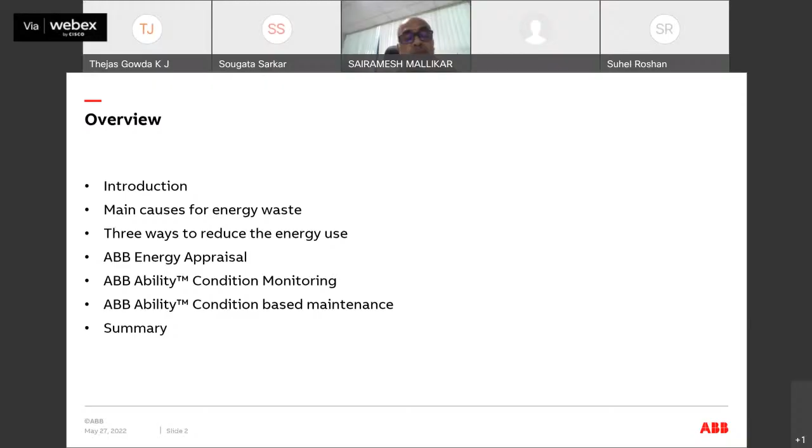First, we'll talk about the introduction, why energy consumption is predominant in the current scenario, and what are the main causes because of which energy is getting wasted in the electrical system. Then the ways in which we can reduce it, and what ABB is offering to the customer: ABB energy appraisal, ABB Ability condition monitoring, and ABB Ability condition based maintenance. These solutions improve the energy efficiency and reliability of your system. We'll talk about these topics in detail, and then summarize everything we have covered in this session.

So first, talking about the energy. As you all are aware, the global population is expected to rise to 9.7 billion by 2050, and the economy will be doubled by 2050. Urbanization and the rise of living standards will also increase. So this will increase the demand for energy in the near future.

And also the demand for drive systems powered by electric motors will also grow. So thinking about all these aspects, one thing that we need to keep in mind is that in the future, energy consumption and utilization will be higher, which will create a demand for energy. But we cannot stop the process. We have critical processes. We cannot stop the plant in order to save energy.

But the way in which we can do it is by using an energy efficient system and reducing CO2 emissions. So how do we achieve it? By using a high efficiency motor and a variable speed drive, which I'll talk about in the upcoming slides.

And talking about industries specifically, more than 70% of the electricity is used by industries. Out of this 70%, 2/3 of the energy is consumed by the motor alone. That is the reason the motor plays an important role when we talk about energy saving in industries.

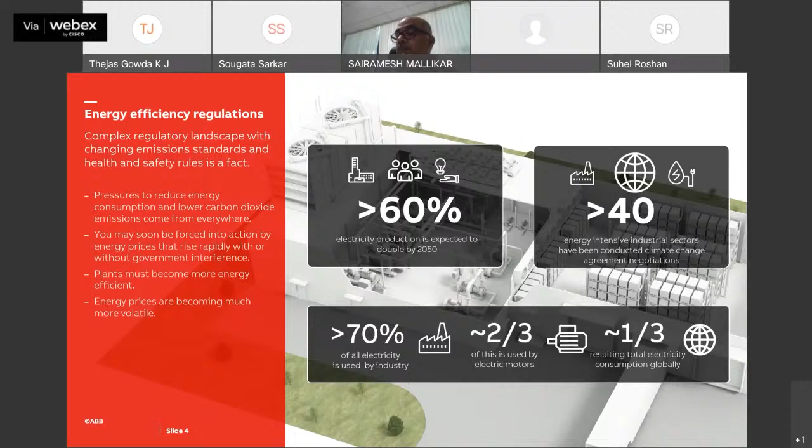The pressure to reduce energy consumption and lower carbon dioxide emissions comes from everywhere. We will soon be forced to use high efficiency systems in order to reduce energy consumption. And the prices are also volatile. Energy prices, if you see, can be volatile. That's why we need to take all this into consideration.

So now looking at the main causes of energy waste in a manufacturing process, there are four main causes. One is the over-dimensioned motor. The second one is the low efficiency motor. Third is a variable load process running at full speed, and then poorly maintained assets. These are the four major causes resulting in energy wastage. We'll talk about these in detail in the coming slides.

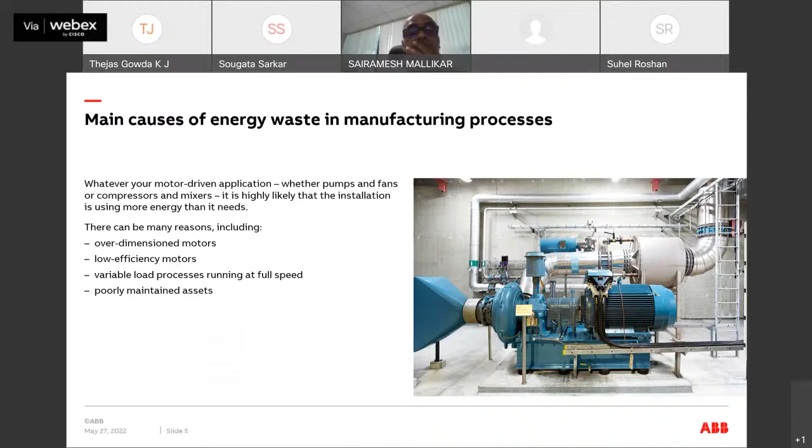The first is over-dimensioning. I would like to explain over-dimensioning by taking an example. Let us take a pump, where the requirement is to deliver a flow of 500 cubic meters per hour. For this application, we need a 50 kilowatt motor. But keeping future needs into consideration, we go for a higher flow, which is 600 cubic meters per hour. So what would our system integrators do?

They will give an additional margin, maybe a design margin or a safety margin of 10%, which will increase your motor kilowatt by 10%, resulting in using a 75 kilowatt motor. And then what will your pump selector do? He'll give an additional 10% margin, which will further increase your motor power rating to 82.5 kilowatt. So then we'll select a motor in that range, a 90 kilowatt.

So now if you compare these two, earlier we required a 50 kilowatt motor. Now we are almost double what is required. We can say it is almost 100% over-dimensioning of the motor. This is one of the major concerns, where from installation itself it is consuming higher energy.

And if as a customer you are still following the traditional way, where you are controlling the motor by the valve, then it will result in much more losses. That is why if you are using a variable speed drive or variable frequency drive, you will be able to save almost 50% of energy.

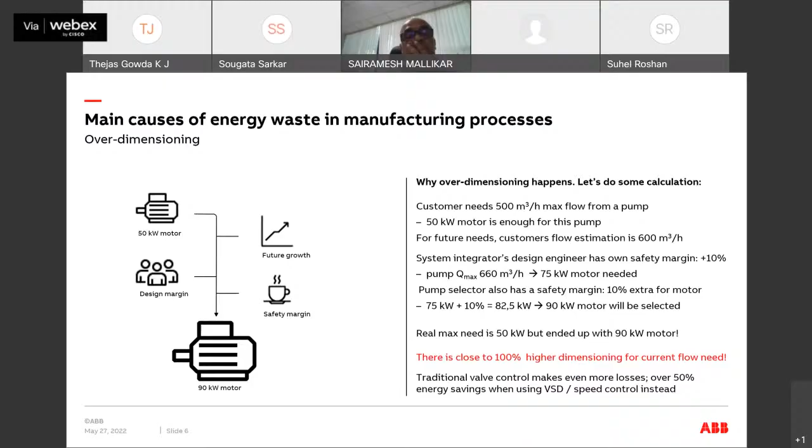Then talking about the second way in which you are wasting energy: a variable load process running at full speed. Take any application where you can operate at different ranges, but you're running the motor at full speed. There is a lot of wastage of energy because the power consumed by the motor is proportional to the cube of speed.

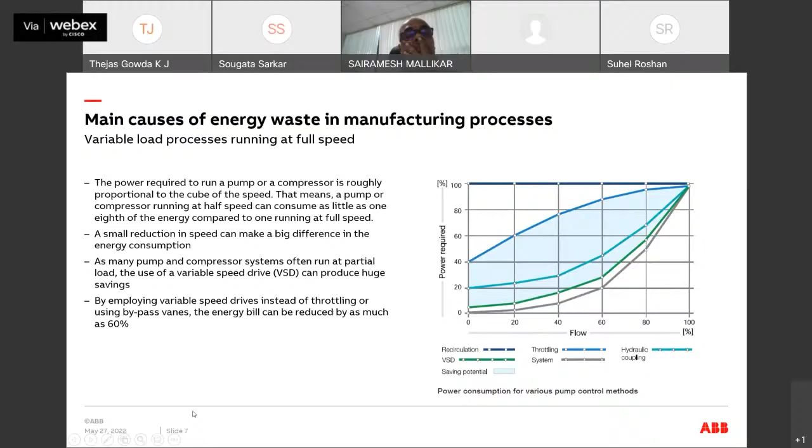Let us assume you're running a motor at 50% RPM. Then the energy required is 1/8 of the energy required to drive at full speed. So you can see the amount of energy you're saving by reducing the speed of a motor. So how do we achieve it? By using a variable speed drive, instead of the conventional way, that is throttling or using a bypass.

And the third way in which you are wasting energy is poorly maintaining your assets. So maybe, what are the electrical systems currently running in your plant?

If you're not maintaining it properly, that will also result in energy wastage. So what are the main reasons? One is reliance on reactive maintenance, because if your equipment is running for a long time, eventually the performance will get hampered. So you need to take care of these aspects, check what is the current efficiency of the system, and replace it based on that.

Then inefficient practices. Let me explain with an example. Take a facility where you're not running production 24/7, but you're still running your HVAC systems all day. This comes under inefficient practices. So you can take care of that, by figuring out how you can utilize it much more efficiently.

And then ineffective scheduling. Sometimes it's not about changing what you do, but about how you do it. So if you have a facility and you're not planning your strategies for how you maintain a system properly, then you will be wasting a lot of energy as well.

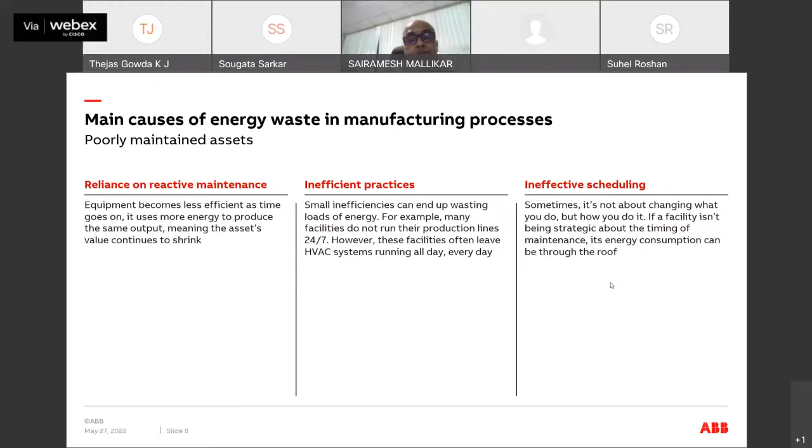Okay, so far we discussed the four important methods of energy wastage. Now we'll see what are the ways in which we can reduce these wastages.

One is to replace the outdated motors with more reliable and efficient ones. Reliability is required because it will reduce your maintenance cost and increase the product life. Going for a higher efficiency motor like IE4 or IE5 will give a lot of energy savings to you.

And then the second one is installing a drive to control the motor application efficiently. We've discussed these drives many times before, so you're already aware of how much energy will be able to be saved. This will help save a lot of energy in terms of variable speed applications and improving reliability.

So we have a solution which ABB is offering, which we call condition monitoring and condition-based maintenance. I'll discuss this in the upcoming slides. This will improve the reliability of the overall system, and how it improves that, we will discuss in the coming slides.

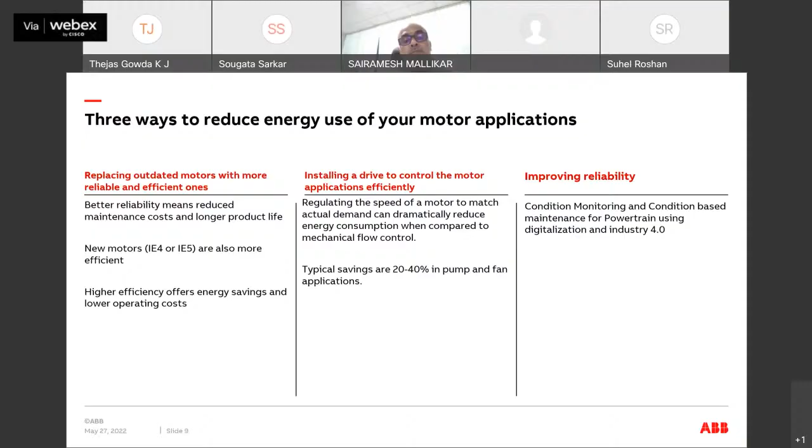Now we'll be talking about what solutions ABB is offering in order to improve the overall system efficiency and reliability. First we'll talk about how ABB improves the efficiency so that energy consumption gets drastically reduced.

Basically this ABB energy appraisal is aimed at giving an insight into your motor or the complete powertrain efficiency. Our ABB experts will be able to analyze your complete system and then give recommendations to you as a customer, whether you want to upgrade the system to higher efficiency motors, include a drive, or include any IoT devices to your system, so that the overall reliability and sustainability will be increased.

So in this ABB energy appraisal, we have two methods. One is ABB energy application specific, and the other is digital powertrain energy appraisal.

What this means is, the application specific energy appraisal is where an expert would visit a site or collect the data from the customer manually, and then recommend to the customer what he has to do in order to increase the efficiency of the system.

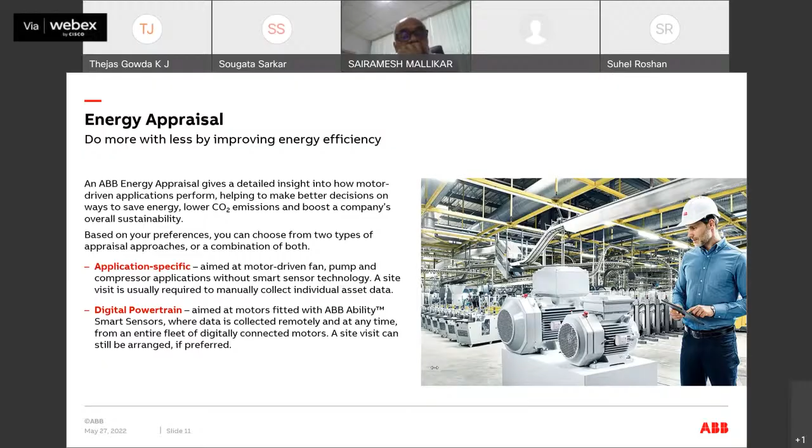And the second one is digital powertrain energy appraisal, where we have an IoT device, which we call the ABB Ability smart sensor, that will be installed in an electrical system and continuously collect data. Based on the data available, we'll be able to make decisions out of it.

So we'll talk in detail about both these methods, and we'll also see some of the success cases that we have. First of all, we need to identify which one is actually applicable for your application, whether we have to go for a digital powertrain energy appraisal or an application specific energy appraisal.

As I already mentioned, in digital powertrain we have an IoT device installed in the system that will continuously collect the data. Based on the data, we will recommend to the customer how to increase the overall efficiency. The other one is application specific, where the data is manually collected and then the recommendation is given. So what would our ABB experts do?

So from the data collected either manually or from IoT devices, they will be able to give a report that says what is the projected annual energy consumed by the system, what is the CO2 saving you have done, and what is the payback period for this upgrade investment. It will tell you by what time you'll get back whatever investment you've done. Then comes the implementation, where we'll implement these solutions and track whether the solution is working as per expectations.

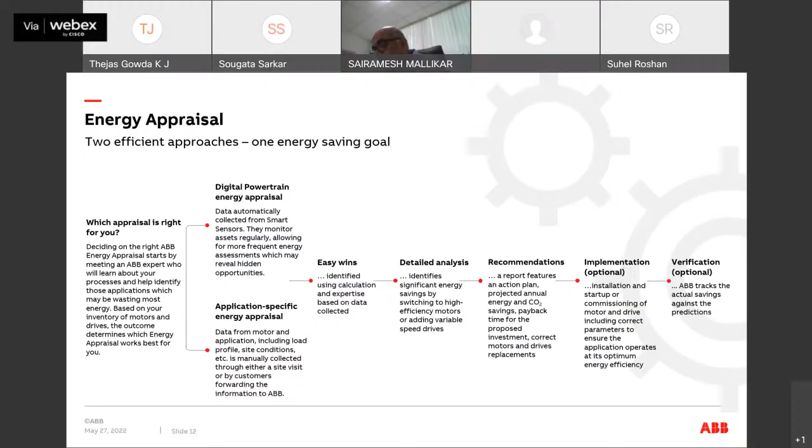This is regarding the ABB energy appraisal. What are the benefits a customer would get? One, they'll be able to cut energy waste and cost. Second, they'll reduce CO2 emissions. Third, lower cost of ownership, because the amount invested for these upgrades can be recovered within a short period. And then minimum disruption to operation, since we can do this upgrade without hampering current operations, performing it during shutdown.

Now we'll see some success stories. I've taken two: one for application-specific energy appraisal and one for digital powertrain energy appraisal. The first one was a customer called Prime Pack Limited, bottle manufacturers from Northern Ireland.

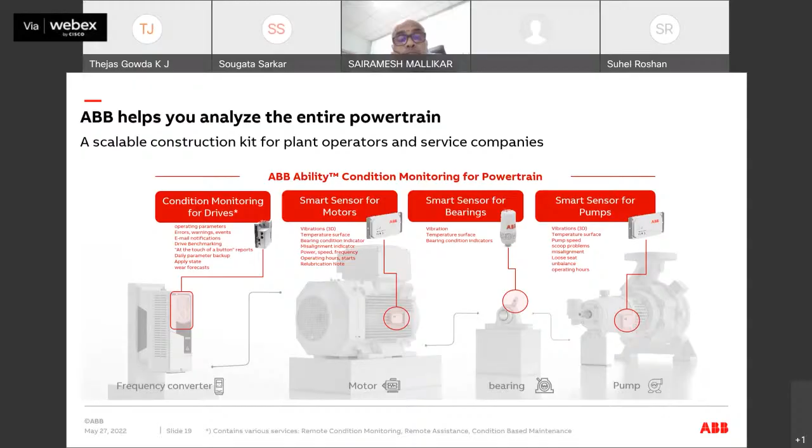Adding to condition monitoring, we have something called condition-based maintenance. As the name itself says, you do the maintenance based on the current condition of your system or the current performance of your system.

This is easy for any person to understand without having to know about the actual drives or motors. By these traffic light symbols, you'll be able to understand which equipment in your plant is performing well, which is under poor condition, and which requires maintenance, so they can plan maintenance not by assuming, but based on actual data or actual practices available.

By using this condition-based maintenance, a reliability manager can take a look into needs and upcoming maintenance. Basically, in condition-based maintenance, we are predicting the aging of a component. If you take a drive, the main components are the semiconductors, capacitors, and the fan.

Those are the important components. If that fails, it will hamper your overall operation, and bringing the drive back into operation is also a time-consuming job.

These condition-based maintenance algorithms, based on the data these IoT devices are collecting, allow us to analyze and predict what could be the remaining lifetime of each and every product, and when it can fail, or when as a customer you can take maintenance for these drives.

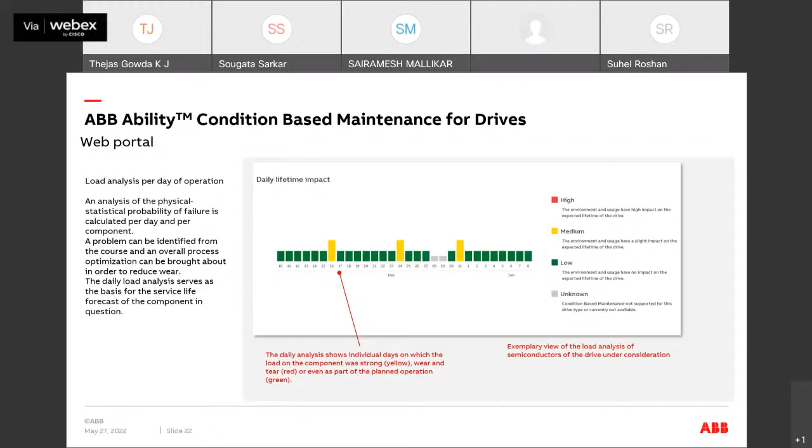If the component is getting more stress on a particular day, you'll be able to check that, as it will become red or yellow depending on how much stress is on your component. This is one example of a chart.

As you can see here, the dark lines show the current aging of a component. Based on this, our algorithm extends the line, so it will be able to predict what is the year in which your component will fail, or what year you can take maintenance.

And this data is not based on the lifetime the manufacturer gives. It is based on the actual data being collected, because we are continuously collecting data from the drives or from the complete powertrain. So this data reflects the actual stress that is there in the component, and we'll be able to predict it.

These are early indications to the customer, so that they can plan or devise strategies on how to take maintenance instead of taking it on an assumption basis.

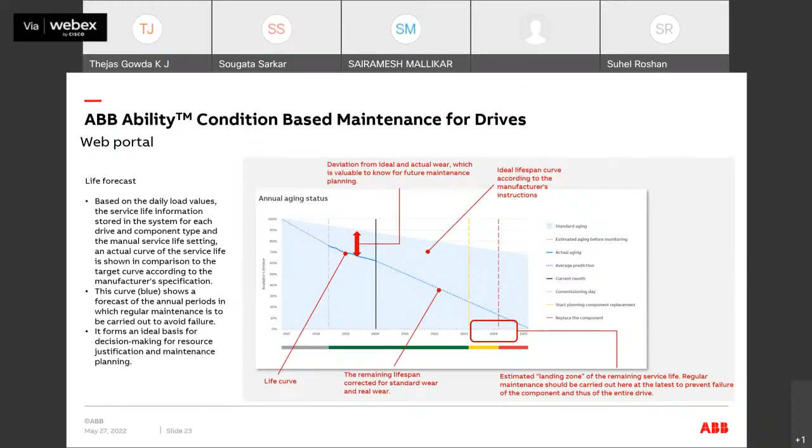And we have one of the success stories when it comes to this condition-based maintenance. This was a success story wherein this remote monitoring system or condition-based maintenance system was active for one of our customers. They were using this ACS 880 drive, where we had installed this remote monitoring system.

As per the data collected by the device, it showed that within a year this component would fail, so they were supposed to take maintenance on that.

Even the real-time data collected from the devices was telling there was a lot of abnormalities in the temperature. The IGBT temperature was rising high and low, which was also predicting that there was some abnormality or aging issue with the IGBT. And after that, the IGBT failed.

This is an example from a customer that we have taken, where our system actually predicted the actual failure. So this is one of the success stories.

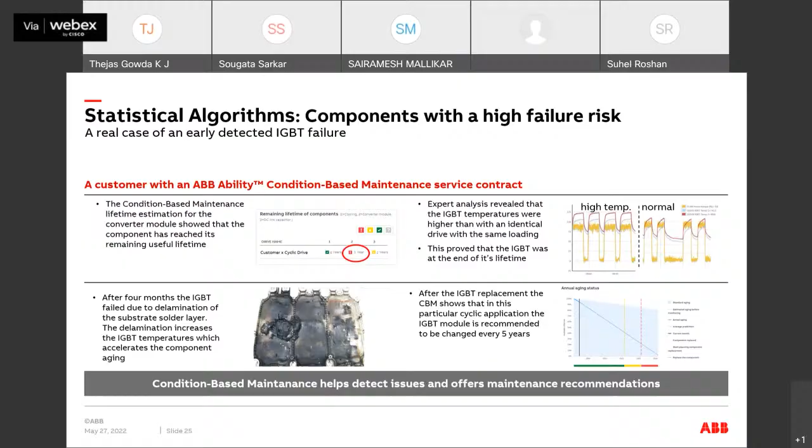To summarize the overall thing we discussed, the worldwide energy consumption is projected to grow by almost 50% by 2050. As a result, global and local regulations are constantly being tightened to drive companies toward more energy efficient operations, and to make plants more energy efficient.

So we already have digital solutions which are already available in the market, these devices and digitalization or digital tools which are available.

So these will be monitoring the data continuously, and they'll be able to tell you as a customer where to act and when, so that you as a customer will be able to take decisions more accurately based on the actual data which is available, and you can identify the areas of improvement in your system.

So ABB is leading the way in digital solutions for energy efficiency for motors, generators, and drives, and we offer digitally enabled services that are accessible to almost any business. In the future, digital outcome-based business models are expected to be a normal part of business life. And at ABB, we have the expertise and the technology to make the transformation to the digital and energy efficient future easier than ever before.

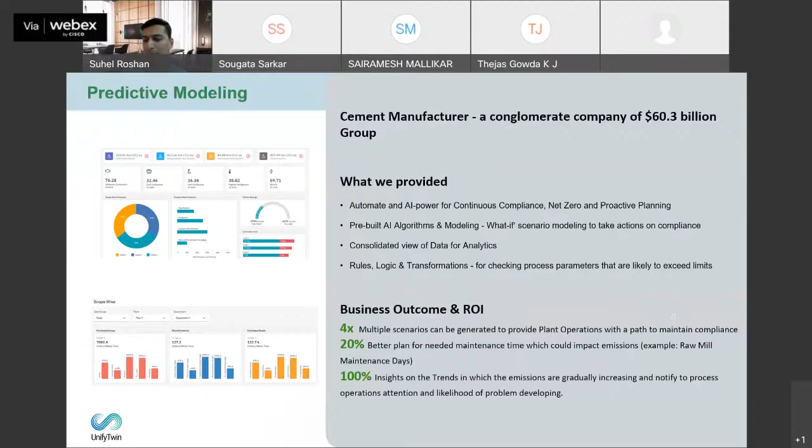The next journey that I want to take you into is predictable efficiency. We saw over the last year a high need for coal and a shortage of it being alarmed across the entire media because of the power demand required for Indian industry, especially in the cement sector. With that being said, having an efficient power plant is very critical. And that is exactly what we did for this particular customer, where we put together predictive insights on how efficiently the current power plant could be run with the existing state of the system, rather than pushing it too hard, efficiently working on critical parameters with upper and lower limits.

So here, the artificial intelligence-based recommendations have tremendously helped the operator reduce the raw material utilized for the same demand required in the plant. The reason is simple. As Tejas mentioned, the rated values that the OEM supplier speaks about for these components do not stay the same. That is why over time plants deteriorate in the efficiency they can render. Data amassed sitting in historians can be utilized to give valuable insights to the operator, creating that value chain of upper and lower limits that critical parameters can be run in. And that is where we gave an option for this customer.

This not just created a reduction in downtime, but also created value with respect to efficiency. Of course, 0.52% efficiency improvement in energy generation is very huge. The ROI numbers have been at the top of the scale, and that's one of the reasons why the solution has been spanned across many locations with this customer. Here we optimized the raw material the plant uses to run the same amount of fuel for power generation, and that is where we reduce the amount of carbon footprint released into the world where our next generation is going to come into the picture.

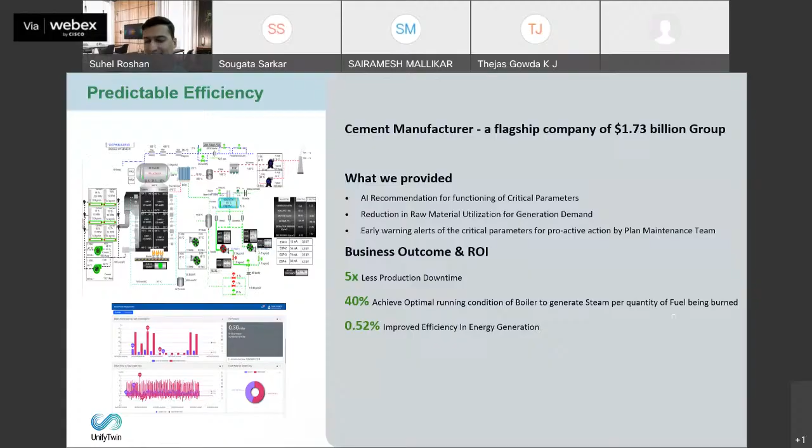One good part about this is where the predictable useful life of asset is concerned. We all know that in the cement plant there are critical components which require major attention because they are the heart and soul of the entire plant. For example, it could be your precipitators, or it could be your roller mills, or roller press, or a ball mill as well. Just a few examples.

The reason why this is very critical is all these components have been installed way back ago, and they require a tremendous amount of maintenance. And when there are huge components which require a timeline of 3 to 6 months of production, and they're going to be shipped overseas, that's one of the reasons why having pre-planned insights on the remaining useful life of components that are likely to fail is very critical.

And that is where we worked with this customer to give them insights with artificial intelligence as the heart and soul at the center, depending upon three major segments of parameters. One is the rated parameters, the electrical parameters, and then the current real-time parameters. Taking into consideration all these three things, we plotted the entire graph of the likeliness and when this machine requires maintenance, and what is the remaining useful life of your components.

Here we created a business value of extending the aging factor for these particular assets, reducing the production throughput losses. Certainly, there's a very big problem because the more we lose these things, it deteriorates over time, and then reduction in the maintenance costs. So here we efficiently made use of the particular machine that's already been installed and gave the plant an option that yes, you have a better advantage, let's go ahead.

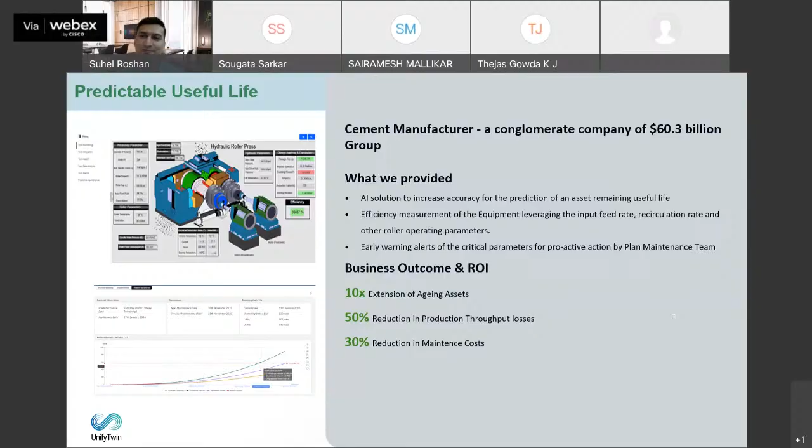Then predictive modeling, as I was talking to you about, on the work that we've been doing on artificial intelligence. This is another example where we worked for a customer where we put together a complete digital twin, a simulating model for the electrostatic precipitator. The main concern that they had was, what are the insights? Why is there concern of breakdown, and the immediate issues that are causing gaps for monitoring critical velocities and parameters.

Here, when we put together all the data that had been residing there, we understood that the savings that could optimize operations were very vast. And that is exactly what we did. We gave a complete roadmap of how the electrical energy consumption has been working, and that created huge savings for this particular customer. We reduced the harmful emissions by making sure that the early warnings have been addressed and all the bag filters and other components within the electrostatic precipitators have been taken care of.

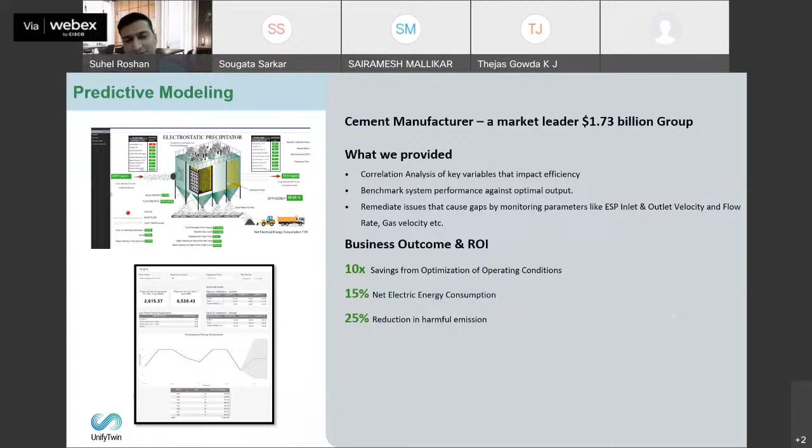A quick another example of plant efficiency and sustainability is very clear, because every kilowatt of your energy being generated has a sidekick, that is your losses. And that is where we gave insights to the plant team, from the generation level till the end of your consumption level, on the entire load factor and the aggregating data. This created a value chain with respect to how the energy consumption is happening and the pattern over time, be it on shift basis, day basis, or yearly basis. We gave them clear insights and the forecasting required.

So through this, be it they are procuring the energy from the state government or private grids, or IEX trading, we brought together that insight that is really critically required. This gave a pattern across different shifts, and over months we noticed shift-based insights that shift one was taking more energy, and the third shift was not taking much. These were critical things that the plant team and the production team could look into and address.

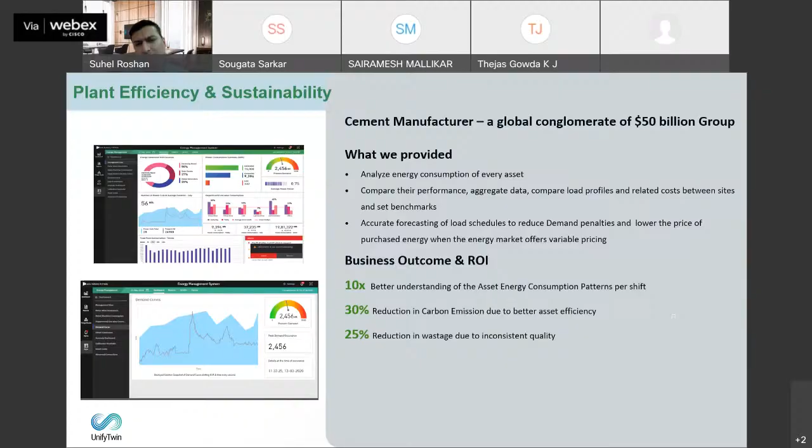So this gave a significant 30% reduction in carbon emission due to better asset efficiencies. When you know that over your distribution from generation till consumption there are a few losses, and you address that at the immediate level, that is where you see that you are saving a huge ton of carbon emission and carbon footprint across the region. Residual inconsistent quality wastage was also reduced, because of the huge turnover of raw material being junked out because the quality has not been the same.

Covering the last bit of the slide here, just a quick overview of what we have been doing across all the cement plants: KPI monitoring, data connectivity with the DCS or PLCs or any sensors is what we've done today, both on mobile phone and web application. Then a digital twin, a twin model for prediction and optimization, is what we put together, a process optimization prediction, a model-driven optimization for better AI-driven insights.

Vision has been a focus for the area, with artificial intelligence and computer vision being a key area of interest, where safety and plant assets or people have been the center of that. Across the entire region, sustainability and achieving net zero has been a pledge, and we are helping our cement customers all across the globe. That quickly summarizes my session. So yeah.

So, Mr. Roshan, really you are making use of digitization in cement industries. Indeed, sir. A very good presentation, as well as easily understandable by each and every person. Because in the cement industry, normally people are all very old, you cannot say old people, they have seen much more changes in the cement industry. And yes, of course, one has to use this to reach net zero with 4.0. So definitely all the viewers and participants will make use of this,

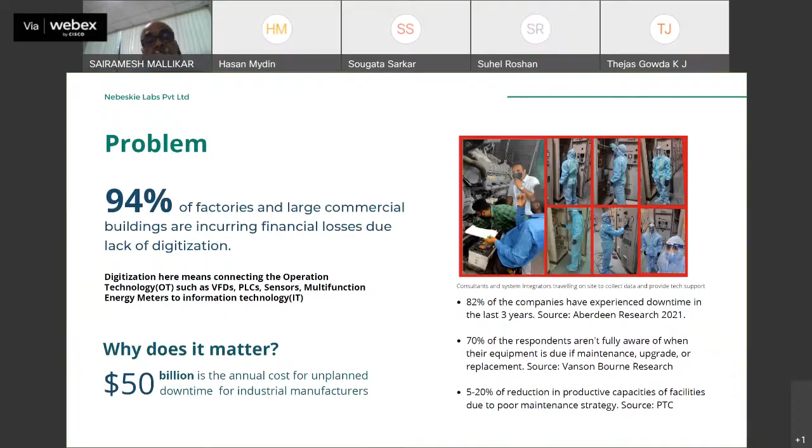Now coming to the problem, why does it matter? Because there's a $50 billion annual cost for unplanned downtime around the world. Looking into the problem in more detail, we figured out the stakeholders: customers, which are factories and buildings; operation technology companies like Danfoss, ABB, and Siemens; information technology companies like TCS, CTS, and Accenture; automation companies like system integrators; and consultants and domain experts, for whom measurement and verification itself is becoming a problem.

One of the key problems for consultants and domain experts is measurement and verification, because they are doing some analysis based on which they are giving support and recommendations, but they are not able to validate and do the performance analysis online. So this is one of the key things that we will be enabling.

Now, a lot of IoT hardware startups are available, and there also, when we look deeper into the problem, it is nothing but the software stack. So this is becoming a problem now. When I go up in the cycle, if you see the OT and IT companies, there are a lot of digitization tools and platforms wonderfully available.

And the challenge becomes interoperability between the brands, between the protocols and between the networks. Automation companies and system integration companies are always dependent on the above OT and IT companies, and they're also falling into the same problem of interoperability, and scalability is becoming a problem. So, this is with respect to problem and solution.

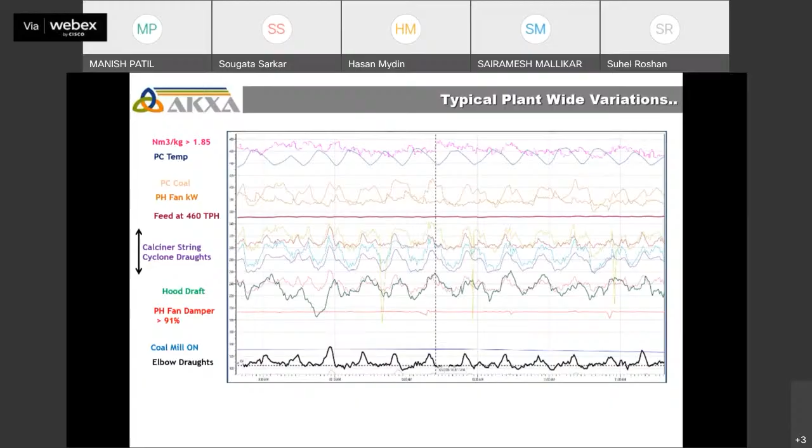These are various types of fluctuations you can see in these images. We need to find the root cause of the fluctuation and where it is arising from. Unless we have the data, we cannot tell just by looking at the live trend whether the fluctuations are more or less. Only once we collect historical data from the DCS and process it in our tool can we get the diagnosis and take appropriate actions.

The fluctuations may be coming from design limitations itself—during the project, the design or selection of final control elements may be wrong. The fluctuation may also come from raw material quality, or finally from transmitters and field instruments that malfunction sometimes. These are a few sources of fluctuation that disturb our processes, limiting productivity increases and consuming lots of energy.

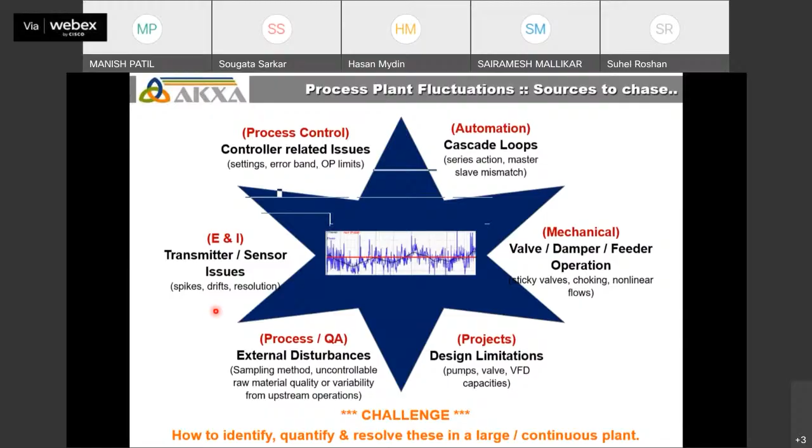So what is our target, what is our approach? Suppose against the given set point of the controller—whether flow, level, pressure, or temperature—the variations are very high. This is the present level of fluctuation, so the operator has no margin to increase this set point, and keeps running the plant as is.

But our approach and target is to reduce these fluctuations by 50% or 60%, whatever is possible from the present level, and create a margin to increase the set point. Ultimately, our focus is to improve the averages, which means higher productivity, lower utility consumption, less wastage, and also increased operator confidence. Along with this, the process itself gets stabilized.

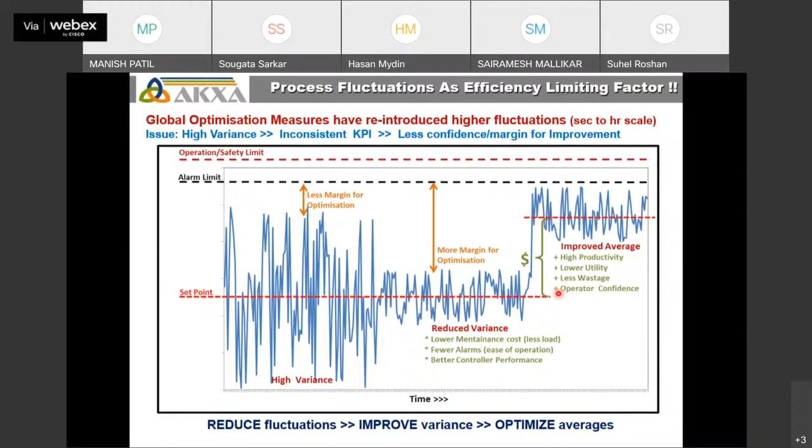Normally in a routine plant, management or higher authority mainly focuses on the KPI variables. But our approach goes beyond just KPI—we dig down further to the equipment level, collecting data at the second-scale, higher resolution level. We study the equipment performance and the controller performance.

Once these down-the-line equipment or controllers are okay, automatically the KPI will improve. This is our approach—we target the final control element or control system, and once it's operating very well, our KPI will automatically improve.

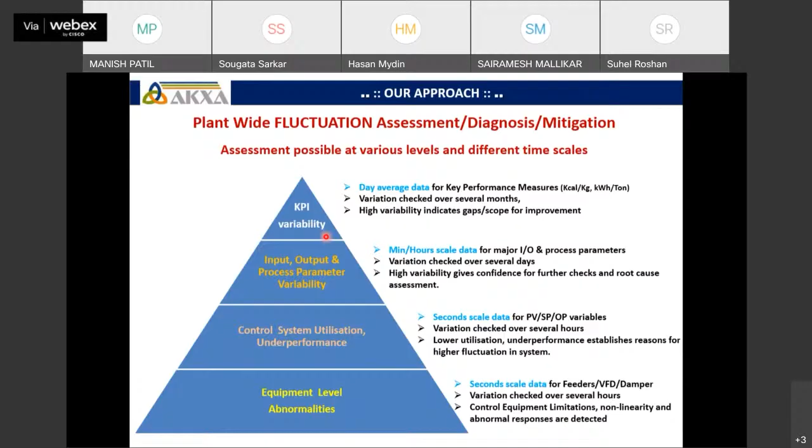So our tool, that is OPTIMakx, we have to give the data - controller data having information of set point, process value, measured value, and controller output. It will assess the data based on the algorithm written inside. It will diagnose based on the patterns, variations, and fluctuations, and give the suggestion. Based on the suggestion, we are optimizing the controller system.

It has a facility of giving 20 plus different statistical measures - minimum, maximum, standard deviation, variance, overshoot, etc. It will give 15 plus types of different root cause diagnosis based on the fluctuations, type of fluctuations, variations, or patterns.

At a time, we can process so many variables, 500 plus variables simultaneously. Within a minute, it will give the performance or results. Based on that, it will highlight some diagnosis and suggestive actions. So based on the suggestions, we are taking actions and stabilizing the control system.

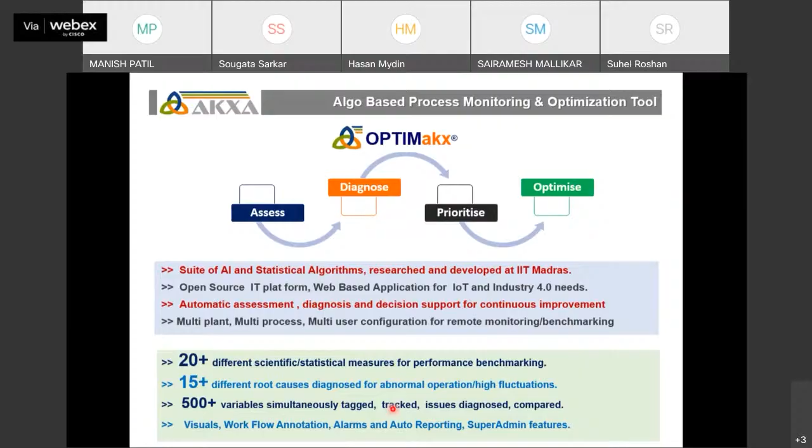About AKXA Tech - this is our startup, recognized as an innovative product by CII and approved by Startup India, mentored by IIT Madras, and promoted by our parent company, that is Aqualize.

We have associated with a multidisciplinary team - chemical engineers, instrumentation, and mechanical engineers.

These are the sectors we have contributed in - cement, metal processing, fertilizer, pulp and paper, glass and ceramic, and power plants. But this tool is not only for this. It is designed in such a way that it can be used for any process industries.

Wherever automation and data facility for extraction is there, we can upload the data into the software, or by hooking up with the DCS, it will take the data automatically by the defined frequency and give appropriate suggestions.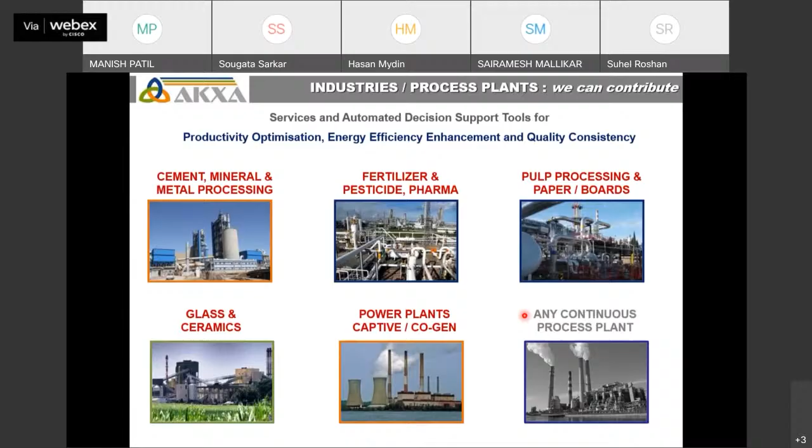So in India as well as internationally, we have contributed. These are our prestigious clients in India as well as abroad.

With this, I will continue with a few case studies - our contribution in the cement industries with respect to fluctuation assessment and control system optimization to improve productivity and energy efficiency.

This is one case study from one of the cement plants, where the kiln firing for coal inside the kiln has one pre-bin for kiln coal feeding. Earlier, the variations were very high with respect to the coal feeding for burning inside the kiln.

Ultimately, the average coal consumption - earlier it was 8.52, and after adjusting the filling cycle range, it was brought down to 8.41. So nearly we can say 6 tons of coal saved net in one day. Along with this, there is an increase in kiln feed from 282 to 296 TPH, almost 14 TPH increased.

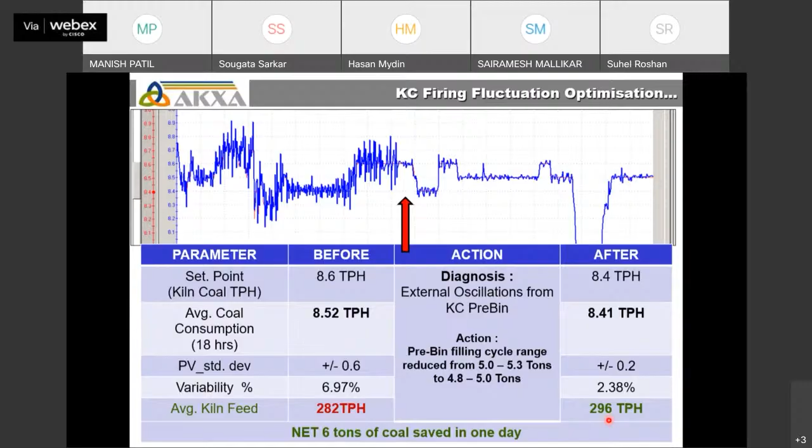This is one case study from a 12,000 TPD plant from India, where we did optimization of calciner temperature, the heart of the pyro process. Before the optimization, the variations were high, and after optimization, they are at a different level.

The variations are seen in terms of controller error percentage - earlier it was 1.5%, and after optimization we brought it down to 0.65%.

The specific heat reduced from 753 to 746 - almost a saving of more than 0.5% coal over 3 months. There is also an increase in AFR consumption.

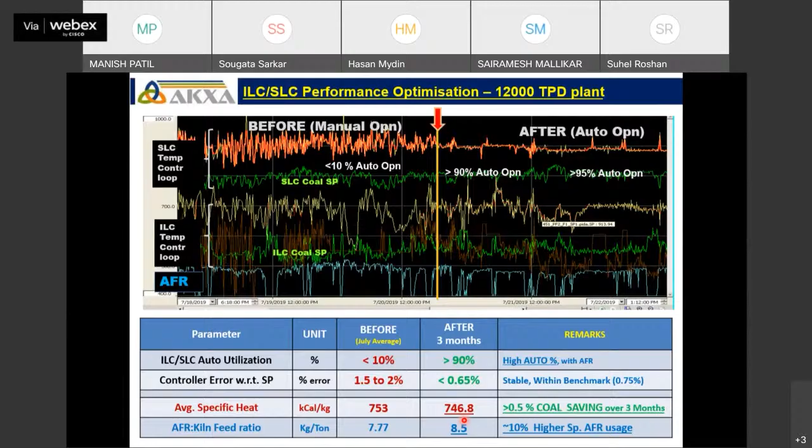There is one more case study from one of our clients from Nigeria - a step-by-step optimization we achieved. We targeted the calciner temperature with respect to coal line as well as gas firing alternately. Initially, the standard deviation in calciner temperature was 14.7 degrees before optimization.

We started optimization from here, first optimizing the calciner temperature controller, and brought down the standard deviation from 14.7 to 8.1. After that, we started another critical loop - kiln hood draft as well as undergrate pressure - and further brought down the standard deviation from 8.1 to 5.1.

After stabilizing and adjusting the cooler fan flows, finally we achieved the calciner temperature standard deviation of 3.1 - so from 14.7, we brought it down to 3.1 plus minus degree centigrade. There is up to 1% fuel saving achieved after optimization from the base case, along with a reduction in specific power and cooler specific air.

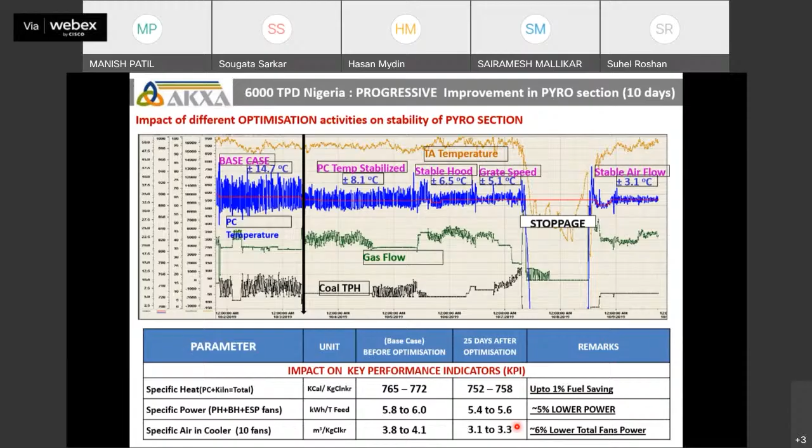So this is one example from after the optimization of calciner temperature. We call it the average controller absolute error. Earlier it was 1%, and we brought it down to 0.4%.

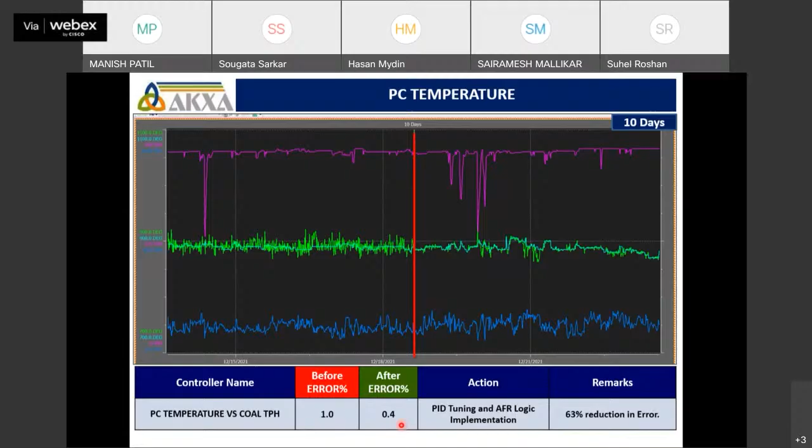So this is one of the case studies from the cement plant, optimization of the calciner temperature from one of the units in Rajasthan. We have done this for two calciners, before and after. Earlier it was in manual, and after it was in auto, and we optimized this.

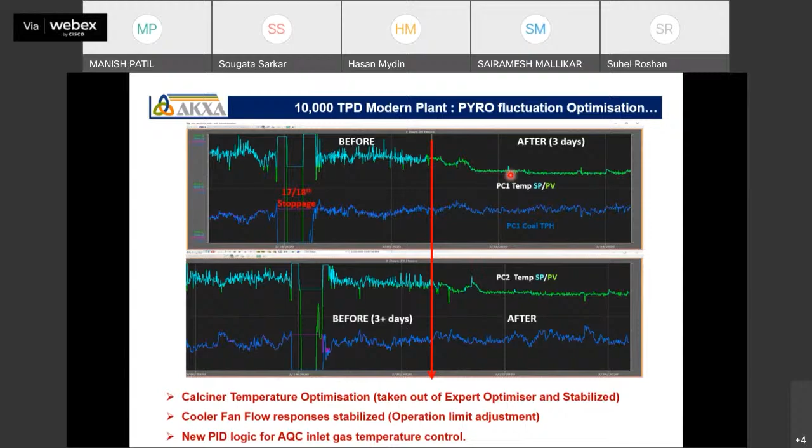The benefit of this resulted in reducing the specific power, and we made some logics in the cooler, that is AQC inlet temperature with respect to the cooler fans. We brought down the specific power, and we also achieved megawatt generation, almost 0.9 megawatt.

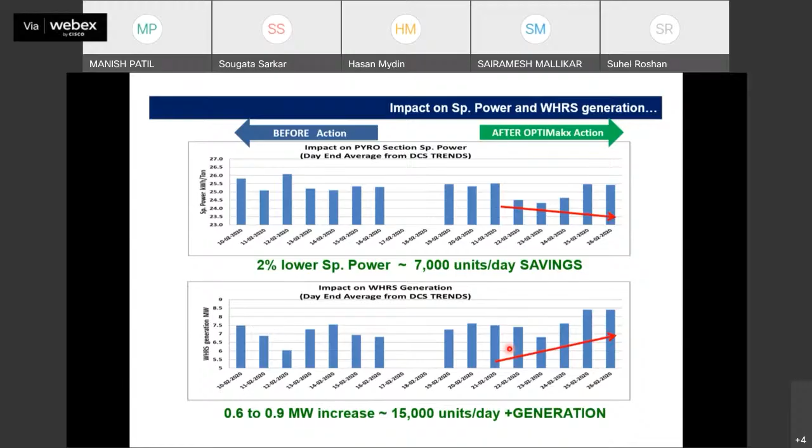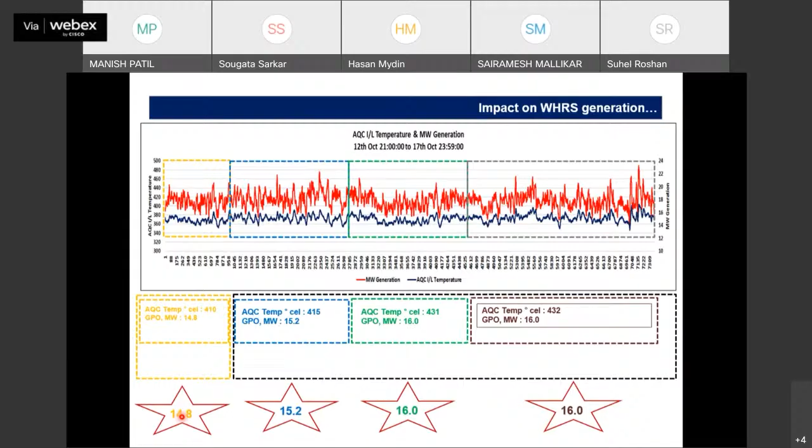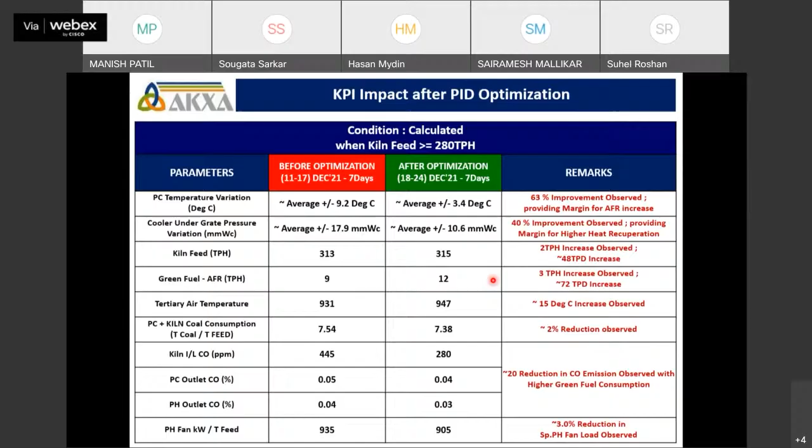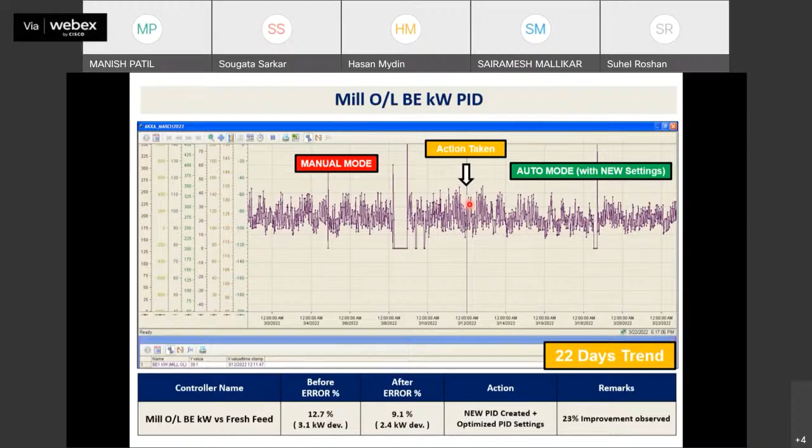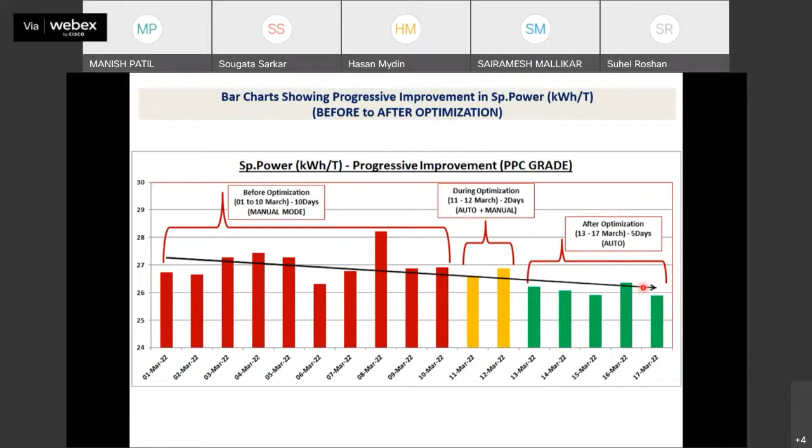Yes, really Manish, with these examples, thank you. We can see the change mainly in the process parameters, usage of power or coal. Actually, we believe whenever there is a certain level of fluctuation, or huge fluctuation, we have confidence that once we reduce this fluctuation at a certain level, even if we reduce 25% from the present level, we can hit the KPI, one of the KPIs.

That's it, yes. Really, your parent company is Aqua Allies, so you should give some value added product to each and every cement industry. Already you may be supplying to all cement industries, other castings. Correct, so this will be useful for the cement industry, to reduce carbon emission.

Really, this is a good presentation, and whatever examples and case studies you have shown is really appreciable. Sir, because of the time limitation, I have selected a few. There are so many case studies, but due to time limitation I have selected these. You can visit each and every cement industry, then tell them this is the real-time analysis of what we do and what we achieved. Correct, okay, thank you sir, really good, thank you sir.